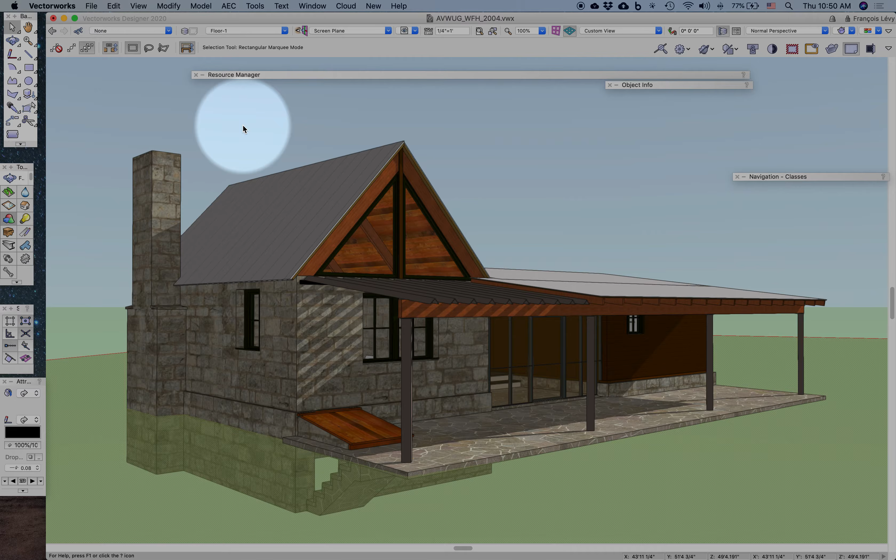The Redline tool, in my custom workspace, I've tucked up here behind the text tool, but it's in the dimensions and markups palette, dims and notes. I'm just going to zoom in over here to this detail so we can have a look at it and do some marking up.

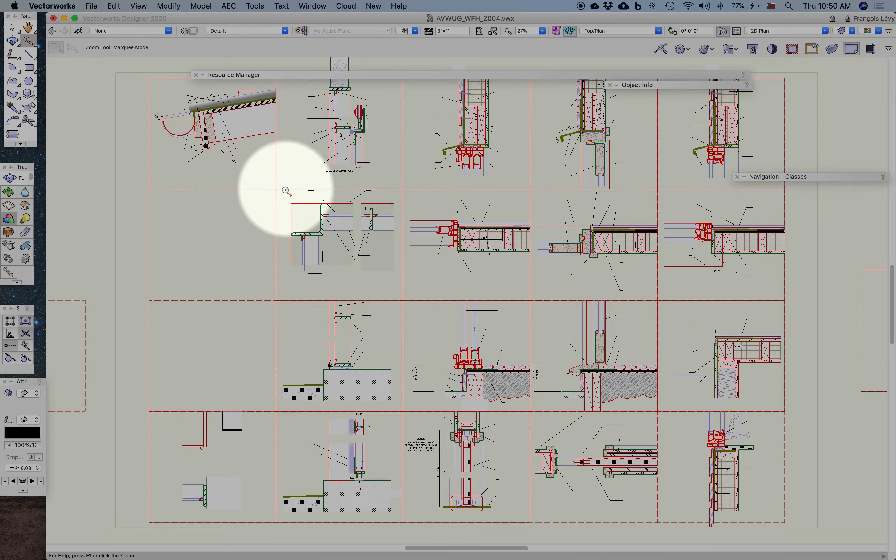When you first launch Vectorworks, your current session, and you go to your preferences, you can see that you have a default redline style and a default authorized by and assigned to, and you can change those depending on what you need. I've gone ahead and set this up, and then with every session it'll reset to a couple of question marks for each of those 2 fields, and you can type in the initials or the name, whatever you want.

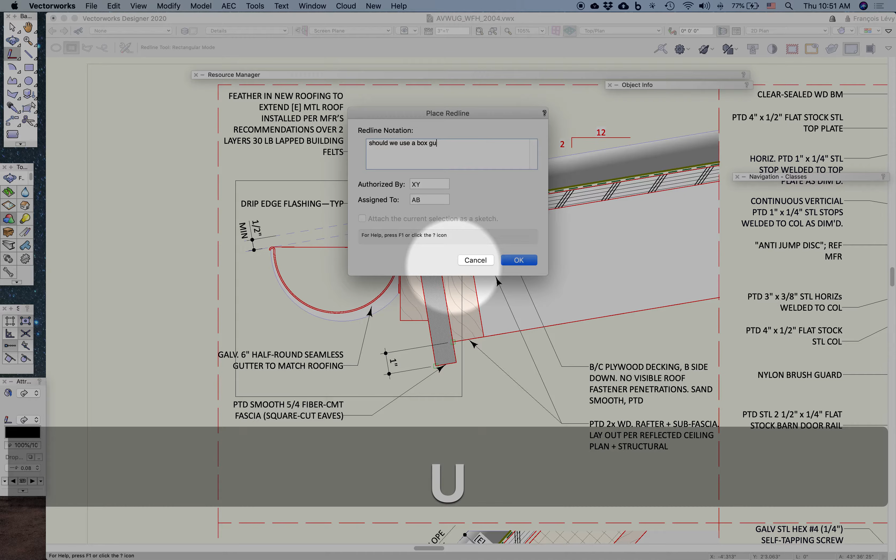So that's fine, and I can draw a red line by oval or rectangle or a polygon or a freehand. I find rectangles to be pretty easy to use, so I'll go ahead and just draw a rectangle here with the Redline tool and type in a note. There we go. And that's it—it creates this lovely Redline object.

I can reposition the note. I can go to the Object Info palette and edit the note. There you go.

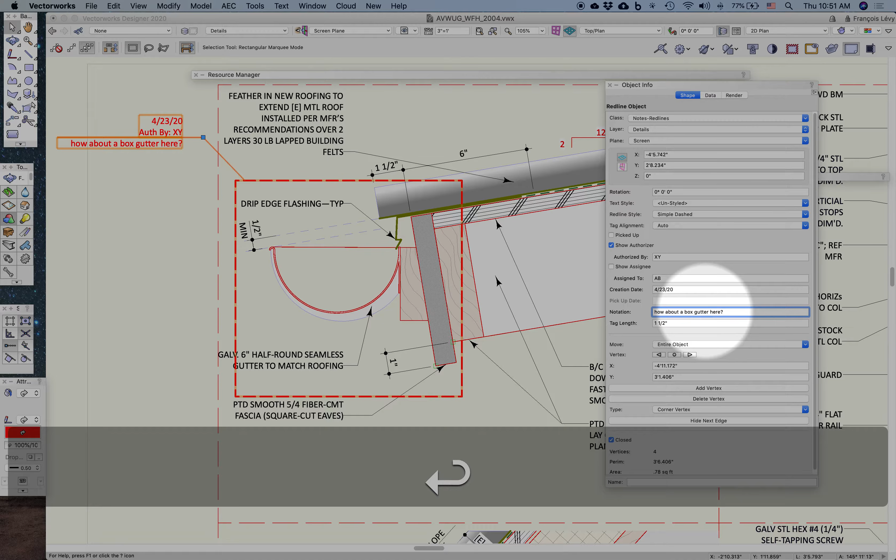And after that change has been made, whoever makes the change can go ahead and click on Picked Up, and then the red line turns yellow, like a highlighter. Kind of cool. I'll go ahead and leave that one picked up.

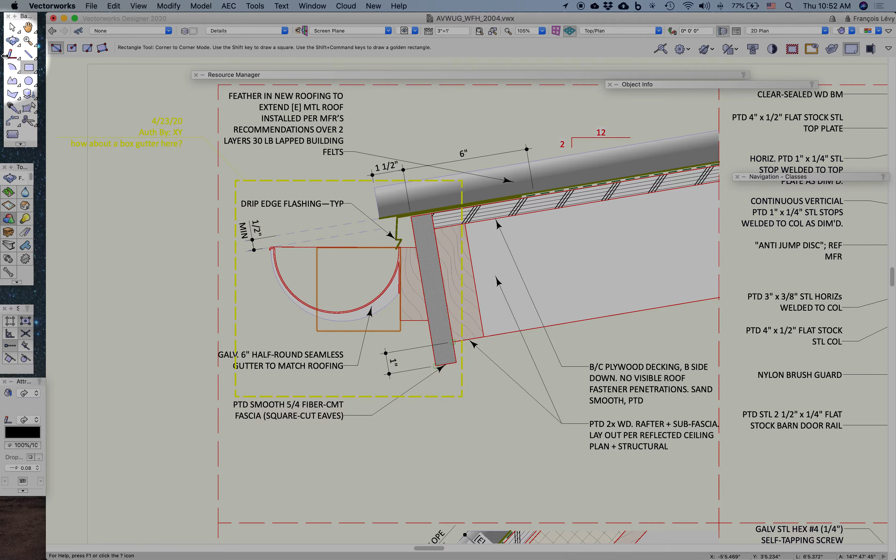Now I can also include objects as a sketch. So let's go ahead and draw a rectangle here, drop that in, and then do a red line again. With the object selected, I'll draw my red line, type my note, and be sure and attach the current selection as a sketch. That will always be turned off by default.

And there it is, it's part of the red line. It can be repositioned with this handle point, but then it'll be hard to snap it back to that corner—just be aware. And then, of course, you can move that handle point to reposition the note.

Now, if you want to draw something that is maybe a little more complicated than just a rectangle, you can do that. So here's 3 lines. Sometimes when I include that as a sketch—let me switch over to an oval here—Vectorworks may drop out part of that drawing.

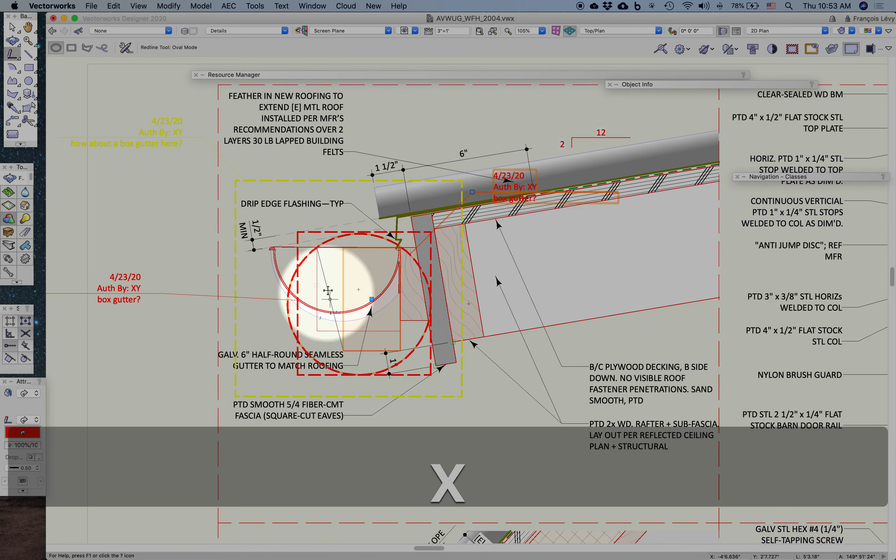So you can see 2 of those lines got included in the sketch, but the last one did not. So let me undo. A little workaround for that is just go ahead and group your sketch and then redline it. There we go. Oh, haha, I forgot to attach it as a sketch.

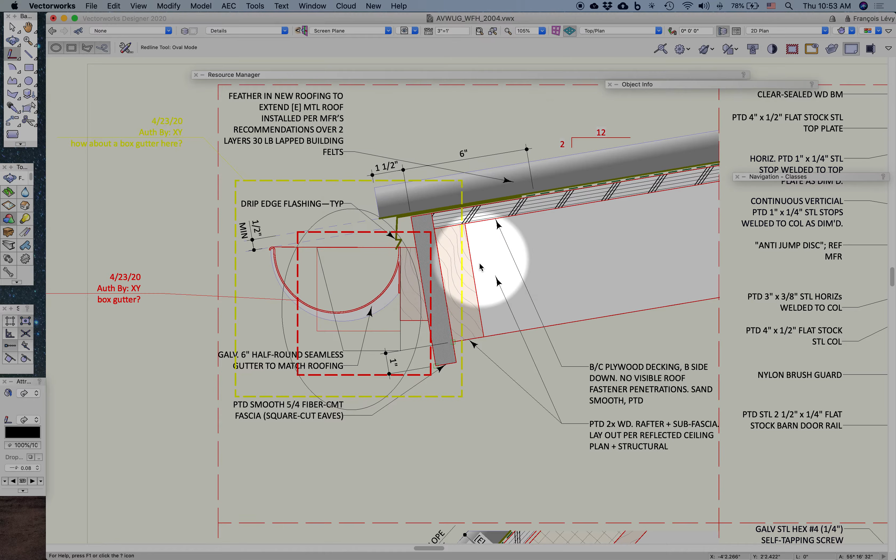Cancel that. There we go, make sure it's selected. Attach a sketch. There we go. Always need to remember to click on that Attach a Sketch.

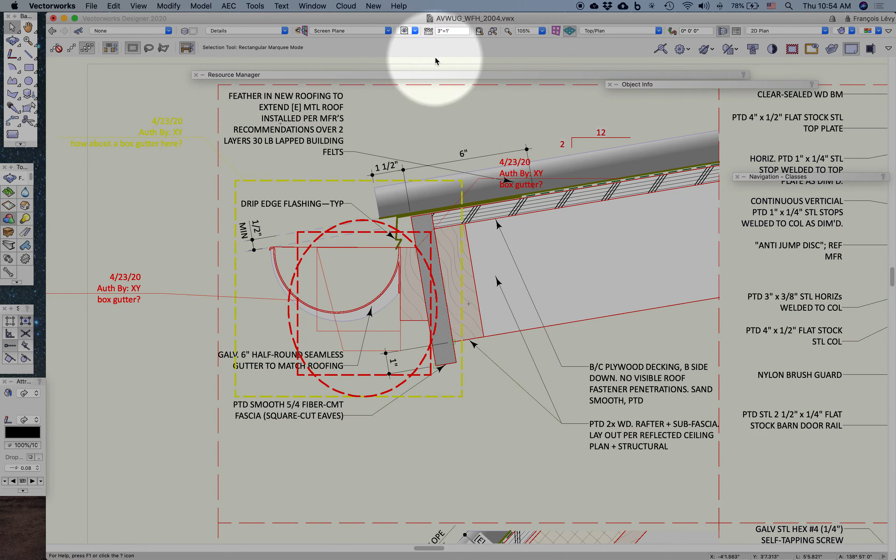Now, I'm not limited to just redlining native Vectorworks drawings. I can also use the redline tool in conjunction with imported PDFs. So here's the same sheet of details that got exported as a PDF and that I've re-imported into a Vectorworks file. So I can zoom over here. While it's fine to mark up your files in Acrobat or Preview, whatever you use to mark up your PDFs, there's certain things like drawing dimensions or complicated little sketches that are really difficult to do in those applications.

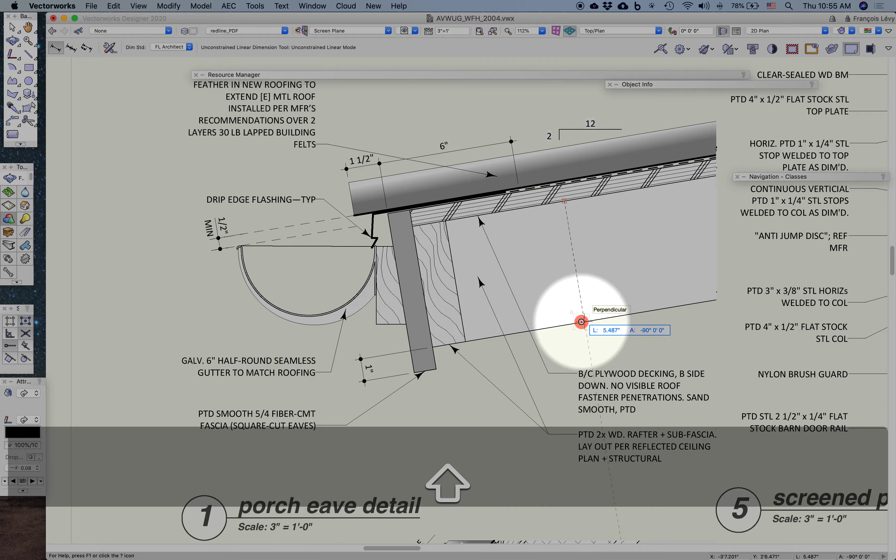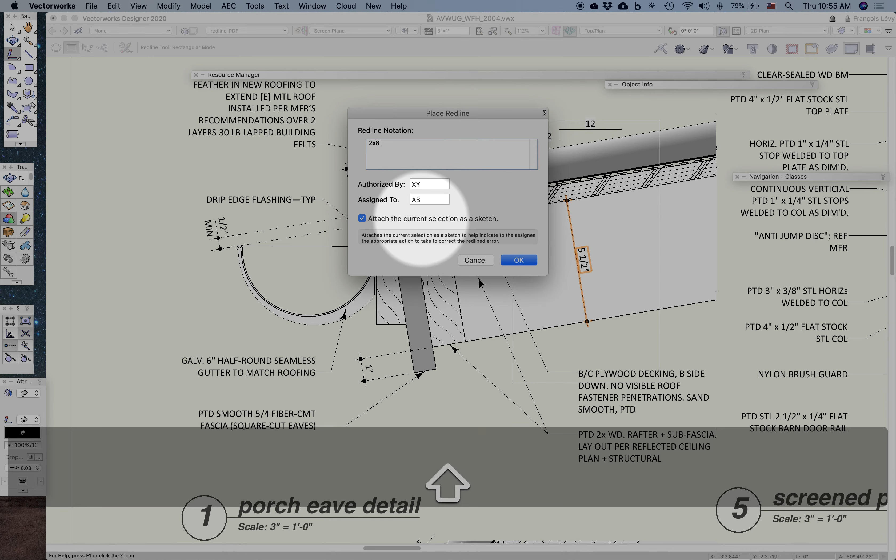So in this case, I'm just going to, for example, use the fact that I can snap to a PDF. So there we go, there's that dimension. Okay, and I'll go ahead and draw a red line and make that a note. Attach a sketch.

So there you go, I can use Vectorworks itself as a really nice sort of PDF markup environment. Now, of course, if I re-export this PDF and give it back to somebody, say a consultant who's not a Vectorworks user, they're not going to be able to turn off all the red lines as an annotation. That's the one downside, but it's going to be a lot easier to mark this up. So just something to think about.

And then finally, after you've spent a morning redlining, you may have quite a few notes, and being able to keep track of which ones have been picked up and which ones haven't could be kind of tedious, sort of leafing through all of your sheets. So under Tools, you can create a custom report.

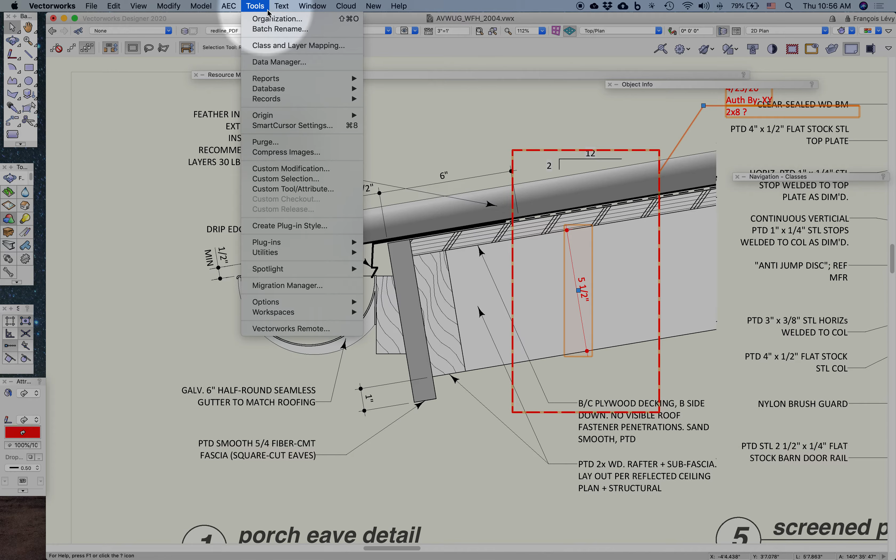Create a report. Objects with a record is your criteria, and then you can list all the different objects with records that are in your current file, and I'll just start typing red, and it'll highlight redline objects so I can find it. So now it's going to find all the redline objects and create a report from that.

Be sure and include viewport annotations as being included, so that if you're marking up inside your viewport annotations, that shows up in the report.

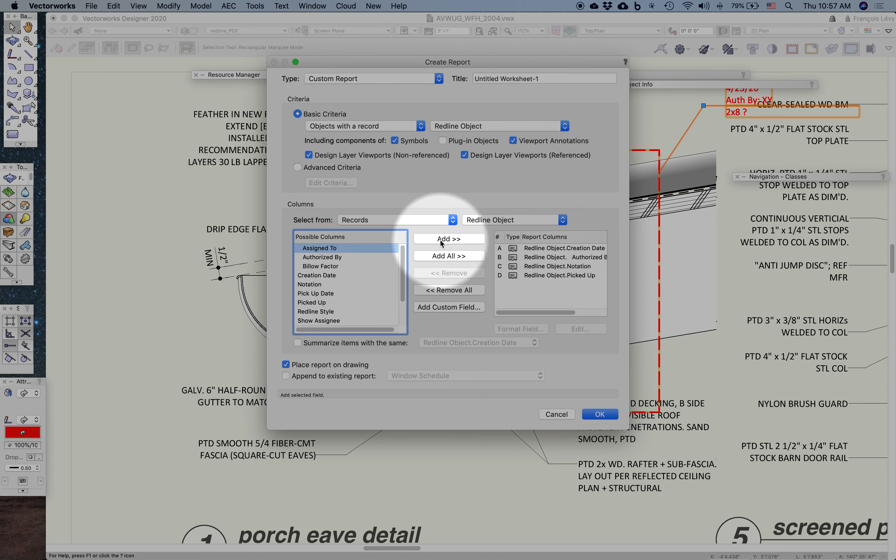Here are all the possible records you could have. You don't necessarily need all of them in the report, so we'll start with creation date, add that, and then authorized by and add that, and then what the notation really actually says, we'll just add that. Whether or not it's been picked up, yes or no, and then who it was assigned to, for example. And there we go.

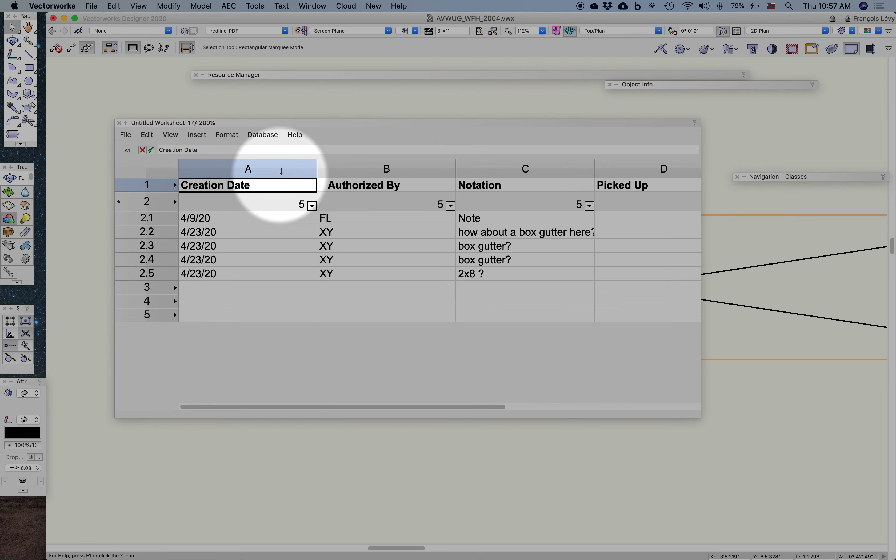And I'll just place it here, and there's that report. Now, obviously, I can format that any way that I want, just like I would any Vectorworks worksheet—make this column narrower, change the font, hide the viewport, the database headers, excuse me. And so I can see all of these that were assigned by, and I could sort by column A or B or whatnot.

So some of the nuances of the redline tool hopefully will make collaborating with your colleagues while you're working from home a little bit easier, and I hope it's useful. Take care.